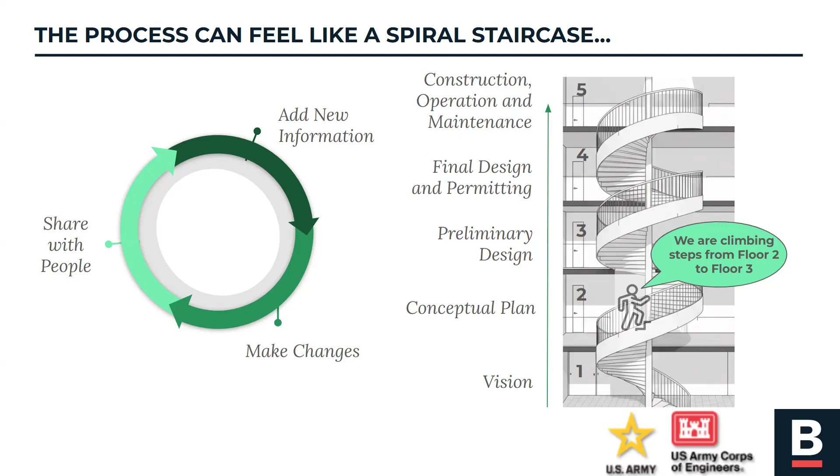Before we dive into tonight's Army Corps 101 and process overview, I want to center folks in this reality: if it feels like a circle, it a little bit is. The analogy I like to use is that the design process can feel like we're continually going in circles at times. But if we step back and look at it from a staircase perspective, I promise you we are going up in our circles. So if the design circle process is to add new information, make those changes, and then share it with people, our goal in this process is to move to the next phase of our work. So where our Climate Ready Boston plans were conceptual plans, we're moving towards a preliminary design goal with our Army Corps partners.

We know that coastal flooding is real, it is evidence-based, it is science-based. That is telling us we are seeing the effects of sea level rise and increased precipitation and storms.

So when we look at turning our Climate Ready Boston plans into action, we're looking at three concurrent strategies. These are all happening at the same time.

Today's storms: we're looking at our near-term response actions, working with our Office of Emergency Management and other partners to work on our response to events and how we can mobilize during storm events.

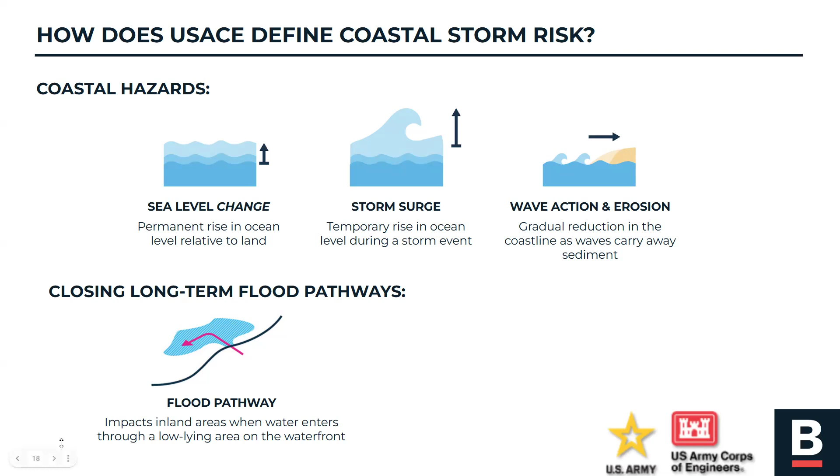So if we're talking about coastal storm risk, we have to understand, well, what does that risk look like visually, so that we can understand it's not just hyperbole and we're not just talking intangibles here. There is science and engineering that supports this.

And so what you'll see here on the screen is you'll see, if you're familiar with the Woods Hole Group Consulting, they have done the Boston Harbor flood risk model, and then they did the MCFRM, Massachusetts Coastal Flood Risk Model. Kate, we're seeing this. There we go. Thanks. The Corps of Engineers,

we have to use our own models because our models are life cycle models. What does that mean? It means we don't just look at one particular event over one frequency over one time period. We have to look cyclically because over time, there's an assumption that the economic damages are going to change, escalate or de-escalate. That structures are going to be damaged and removed from the floodplain, or structures are going to have infill development into the floodplain. And so we need to calculate all that.

In order to do that, we have to use our own model. But what we wanted to make sure is that the City of Boston, the state of Massachusetts, and the New England region, while they continue to use MCFRM, and then we use our coastal hazard system model, they use the same foundational AdCirc model, but the floodplains look very similar. So we know with a great level of confidence that whatever plans we recommend will be able to tie in with the City of Boston's plans.

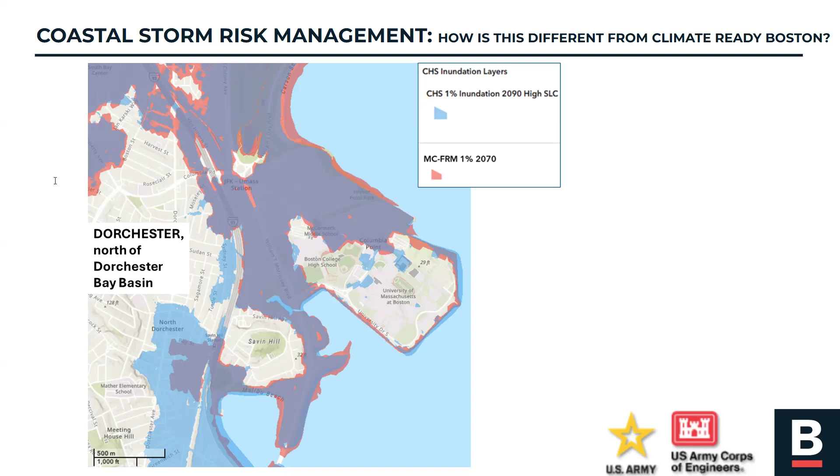Because what we don't want, and if we can go to the next slide to see the southern part in the Neponset. What we don't want is we don't want the City of Boston, the state of Massachusetts, and private stakeholders to invest in resilience projects for us to have to come in five years and tear them out and build something different because it's not part of our program. It doesn't help anybody, and it's not a great use of assets.

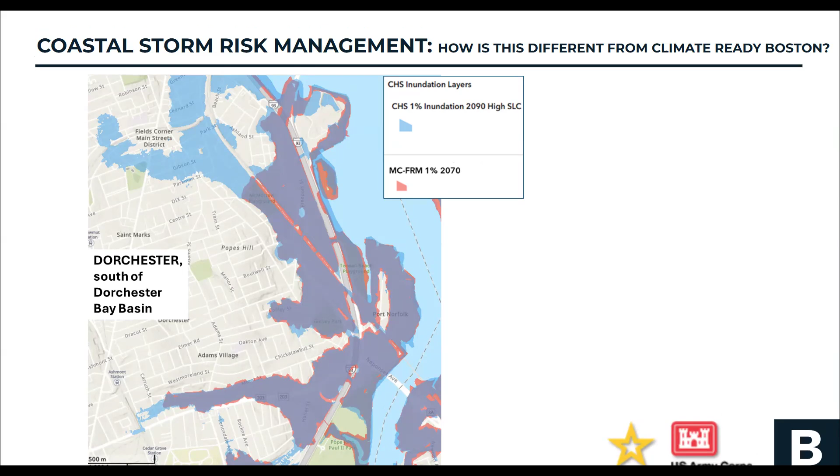So what we've done is we've incorporated the same level of mesh and detail, and we've evaluated the two models to ensure that whatever the City of Boston and stakeholders using the MCFRM implement will be able to tie into our projects. Because the idea isn't that the city does short term, we do long term, so we're going to come in and build on top of or tear up the city's projects. No, we're going to integrate them into a comprehensive system. The intent here is a watershed level system that manages flood risk.

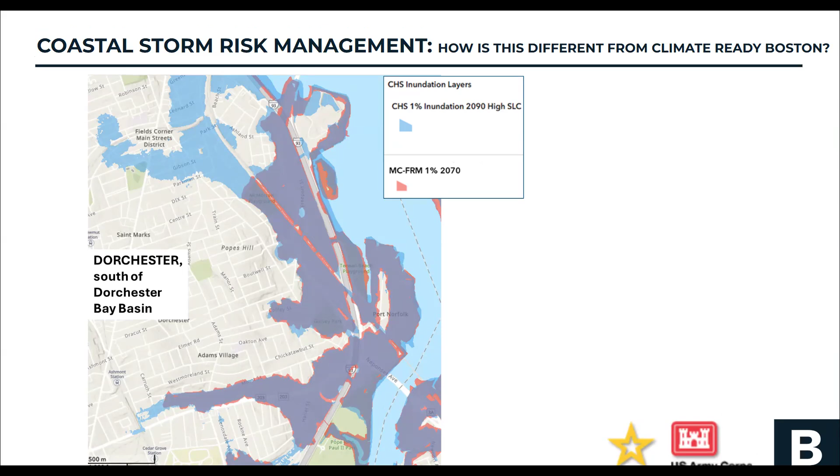I keep talking about managing flood risk. Let's go to the next slide. What do I mean when I talk about managing flood risk?

I mean that we have to manage those risks in order to protect evacuation corridors, public transportation. There's lots of areas throughout Boston where over 50% of the census tracts depend on public transportation. We have to protect those critical infrastructures, homes, schools, government offices, emergency management services. We have to protect housing and homes. We have to protect clearly the critical transportation, but we also have to, it's our duty and obligation to protect natural resources.

I'm a big fan of Aldo Leopold, if anyone's familiar with his work in the 1940s, 1950s. And what he came to realize is if you don't consider natural resources in your planning, then what you end up doing is you create habitat for invasive species, introduced species that create then adverse impacts on your built and your human population. And so if we factor in natural resources into our planning process, we can create comprehensive biophysical and developed community solutions to coastal storm risk.

And so that's definitely still part of our charge. Next slide.

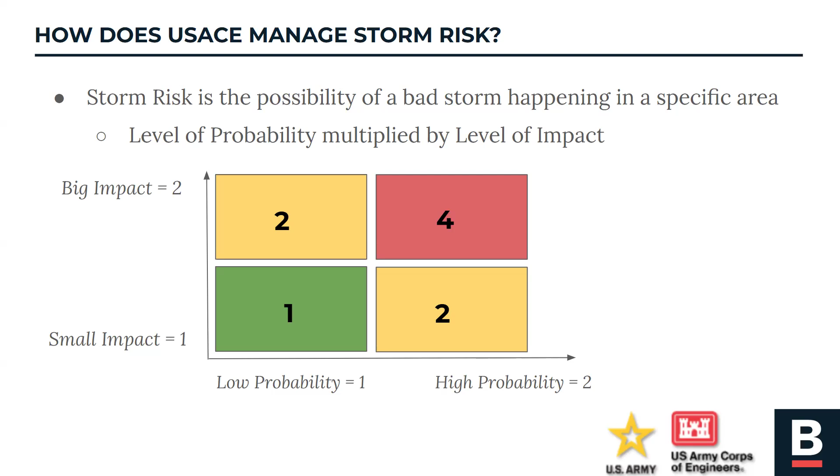The flood came, we realized it's probably not a good place to build, let's move to someplace else. That was a form of adaptation and accommodation. Today, in a built environment, we're not going to pick up the city of Boston. We're not going to pick up downtown in the financial district and move it.

However, there are ways for us to reduce the consequence of the water from coming in. We may not be able to stop the water from coming in effectively, but if we can reduce the consequence, then we are still reducing the risk. And so that's where we come up with those types of non-structural solutions.

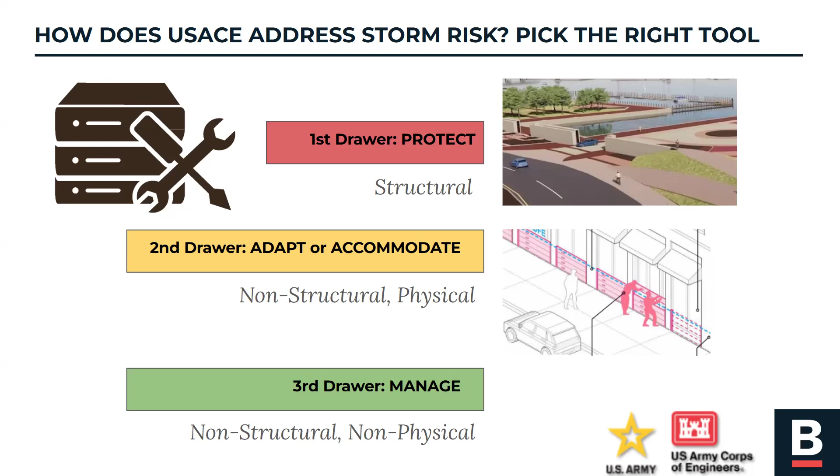And if you're going to understand the tools - next slide, please - you have to understand what the hazard is that's impacting your community. So in Dorchester, you are built in many areas right up to the harbors, or to the developed edge, so you move straight from developed community into the water. In other areas, you have slivers of beach.

Tenean Park or Tenean Beach is an example where you have just a little bit of beach. And then you have other areas where you have a riverine condition, right there in Dorchester along the Neponset, where there may be opportunities to take softer, adaptable approaches.

So it's understanding what is the hazard facing. Is it wave attack and erosion? Not really. The biggest threat and hazard facing Dorchester is the wall of water that comes in, that storm surge, tied to an 11 to 12 foot, 10 to 12 foot tide range, from low tide to high tide.

That makes you different than Stratford. That makes you different than New York. That makes you different than Honolulu, Hawaii, these other places where they're trying to implement resilience projects. When you have such a significant tide range, you have to consider that in developing what your solutions would be.

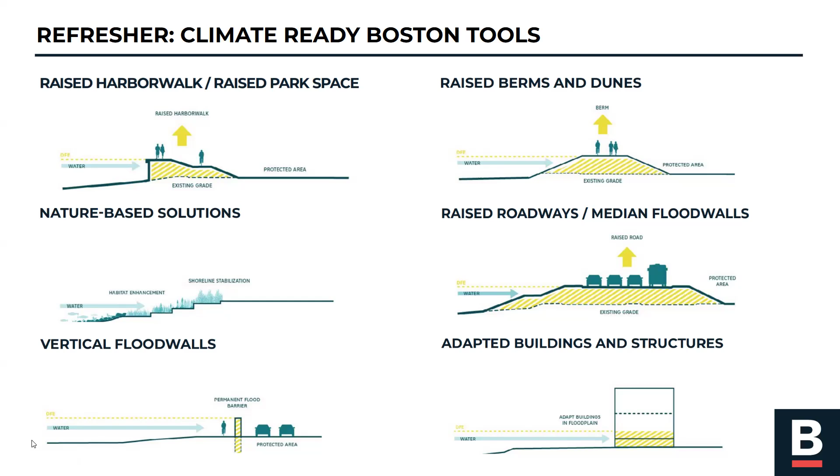So we talked a little bit about this. Here's some examples. Now, what I will tell you is these examples are not your examples. Some of these examples are for tropical events. Some of these examples are for undeveloped and previously undeveloped coastlines.

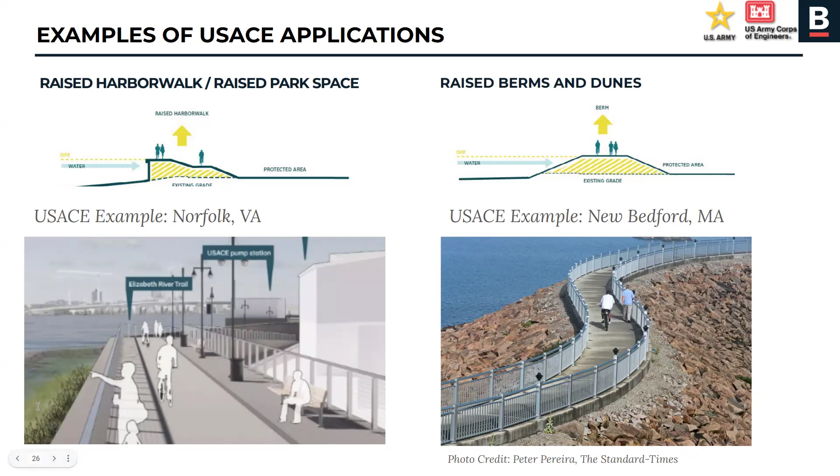So if we're going to build something along the coastal edge, we have to understand and work with Boston Water Sewer Commission. How is it going to impact the interior drainage? How is it going to impact stormwater management? There may be some instances where we need pump stations in order to help evacuate the water so that we're not inducing risk from our projects.

New Bedford - if you've been to Fox Point, New Bedford - there's other examples where we have built very robust storm surge barriers, raised berms, and they perform very well. But am I telling you that the community of Dorchester is going to get a 15-foot solid rock berm that goes along there and you have to get used to it? No, I'm just sharing it as a tool in the toolkit.

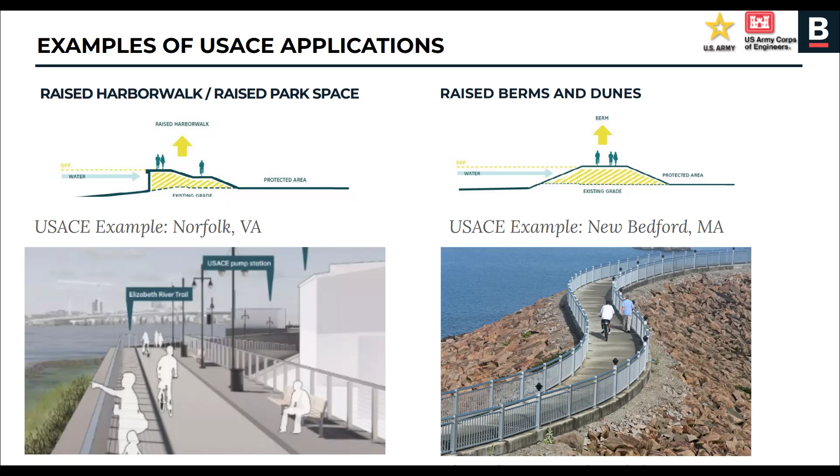Next slide. Flood walls. Dorchester is not New Orleans. Dorchester is not the Missouri River. It's not the Mississippi River. You're not going to have 15-foot flood walls.

But I will tell you, and many of you already know this, that if you walk along the coastal edge, there's significant changes in elevation - not necessarily visual to the naked eye, but in some areas you go from 8 feet NAVD 88 to 13, 14, 15 feet NAVD 88. So if we're talking about having flood walls or barriers of any sort in some areas, we don't just base it off of stick-up height above ground elevation, we have to base it off of water surface elevations, which are based off of the NAVD 88 scale.

So there's going to be some areas where it appears to have a 5-foot stick-up height above ground level, and other areas where you can barely tell - maybe it's 1 foot, 2 foot, maybe 3 foot - and it appears as though it's a new handrail for ADA compliance, when in fact it's actually a flood control feature. So when you see these barriers here in this Norfolk example, I don't want you to think that that's the wall we're considering putting up in Dorchester.

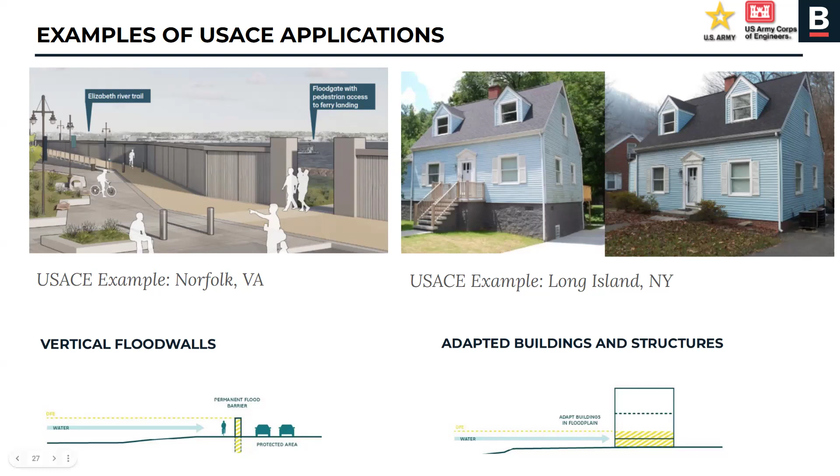So the question is, how can you help today? The same way you've already been participating: ask questions, share your concerns, help us understand what our flood picture looks like, what Climate Ready Boston put forward, what your issues with the Climate Ready Boston alternatives were, and what we're missing in our alignments.

We're getting ready to go into this next phase of discussion tonight, where we'll show you what alignments we're looking at in different areas, and what proposed tools we're looking at in those areas. You'll see a couple areas with nothing on the map, because we're still trying to work through a lot of complexities in some of these areas.

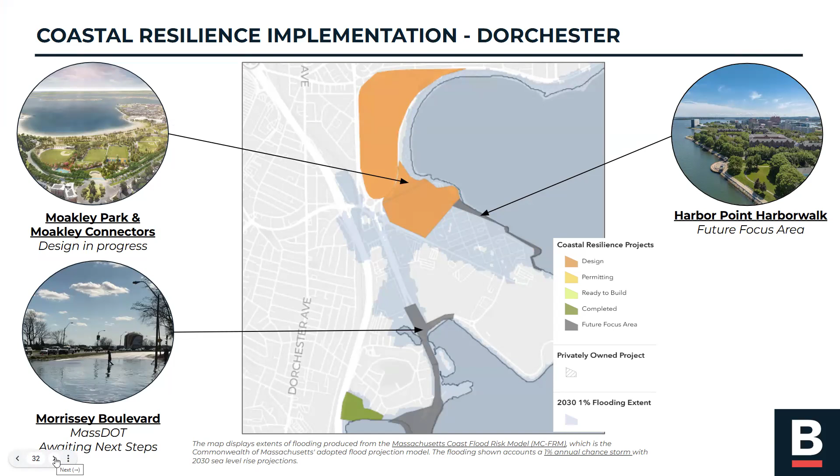So as we travel from north to south here, there's some areas where it's going to feel like I'm going a little bit faster, and some areas it's because we don't know what we don't know, and a lot of it's tied to what other folks are working on in other state or city agencies. In other areas we're going to spend a lot of time because I want to plant some seeds and start some conversations that need to happen over the next couple of months.

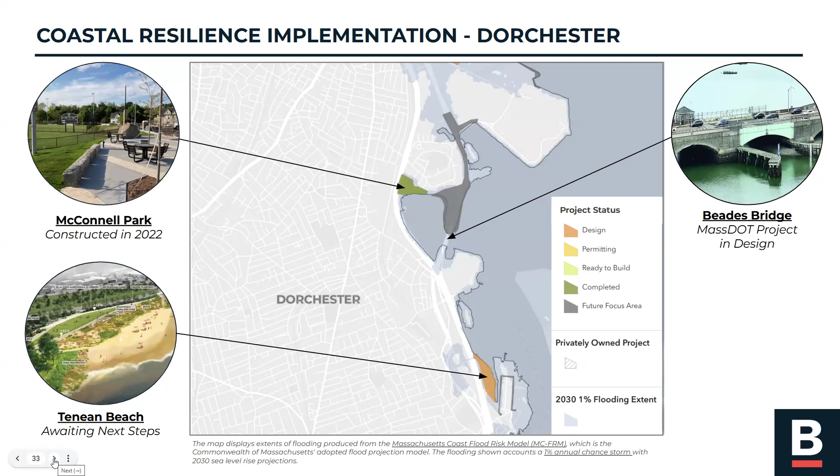So what you're seeing here, the first two slides, is just a repeat of the fact that the Corps of Engineers is one piece of the resilience puzzle, but credit to the state of Massachusetts, DCR, Massport, MBTA, and the city of Boston. They're not resting on their laurels waiting for the Corps of Engineers to implement a project in 2040 that can't address a flood risk that's going to happen in 2030.

So McConnell Park, Tenean Beach. As you look, there's 7 areas highlighted in circles. These are the flood pathways, and those critical areas where we've identified we got to do something. And if we don't do something, we're not going to be able to create, construct, and implement a comprehensive system of features. We'll be putting band-aids and creating weak points along the coastline.

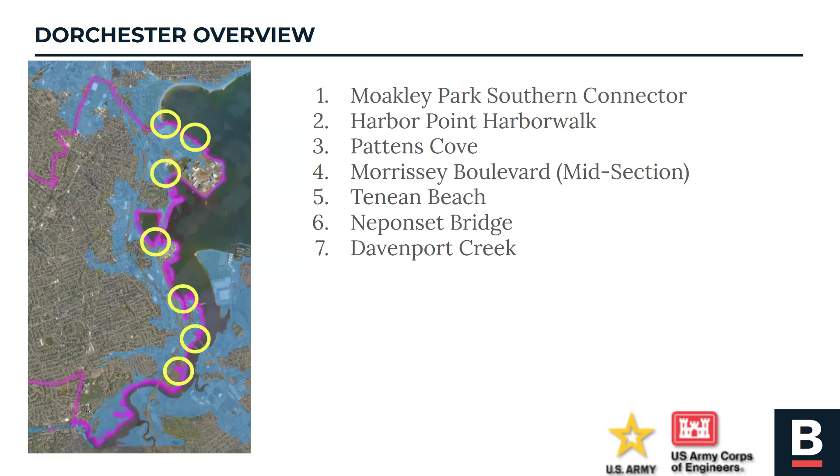Now, what does that look like from reducing probability versus reducing risk consequence in order to manage the risk? It's a little bit different across the neighborhood. So let's take a look, starting with Moakley Park.

At the tail, the southern portion of Moakley Park, we know that the city and Boston Planning are working on Moakley Park, and we realize that there's FEMA BRIC grants in play. If you look at this alignment it should line up pretty closely with the city's vision. And it lines up with that, not just because it's the city's vision, but because it's the vision that makes sense. It's the vision that allows for the necessary elevation in the barrier, but it allows for enough space from what limited beach you have to try and allow for some natural processes in order to allow for reduced risk of exacerbating the erosion risk along that area.

And so then we move down along this area, and then there's the Harbor Point community. I believe we have some folks from the Harbor Point community online tonight. And then it ties in up here at the JFK Library, which quickly grows or increases in elevation. So that's kind of the tie-in point.

Now, what does this look like? It could look like many different things. It could look like a flood wall on the land side, not the water side. It could look like a flood wall on the water side, not the land side. There's an existing harbor walk there in case someone's not familiar with it. But if you do a landside flood wall, then you have to have openings along that flood wall to allow people access to the harbor walk, or you have to relocate the harbor walk. But at what cost are you going to do that?

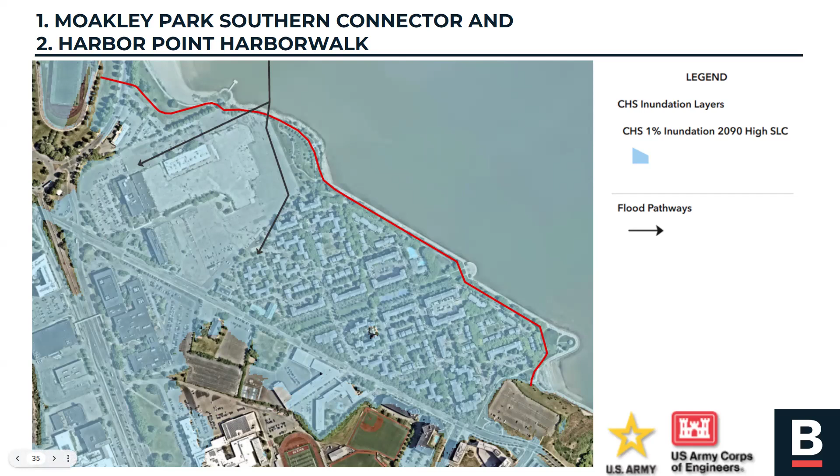We're just going to let the private properties fend for themselves. That's not how risk management works. It has to be a comprehensive and complete solution. Next slide.

All right, so now as we look at Pattens Cove, Savin Hill, and Morrissey Boulevard, we recognize that DCR, the city of Boston, there's a lot of people who have a vision for what Morrissey Boulevard looks like. We are open to all of those discussions and we are part of all those discussions, and we appreciate being part of them.

However, right now, in the limited authority we have and what our charge from Congress is on this study, we are looking at some sort of barrier along the back of Pattens Cove. We recognize that it would have to come up and somehow cross Morrissey Boulevard. Does that mean elevating Morrissey Boulevard, or does that mean a closure structure going across? We don't know, but we recognize that in order to have a complete solution, we're going to have to incorporate something through this Morrissey Boulevard area.

And then on the other side, we recognize that we have to cut off that flood pathway. Now, what you don't see here is at the bottom of this screen, if you zoom in, you'll see there's a lot of blue on some houses. So this is one of those areas where it might make sense, rather than trying to take people's property and construct a flood wall or barrier, to just non-structurally adapt these homes in the near term and long term. That might be through elevation or other ways. We're not saying we're buying out these homes and telling them to go find someplace else to live.

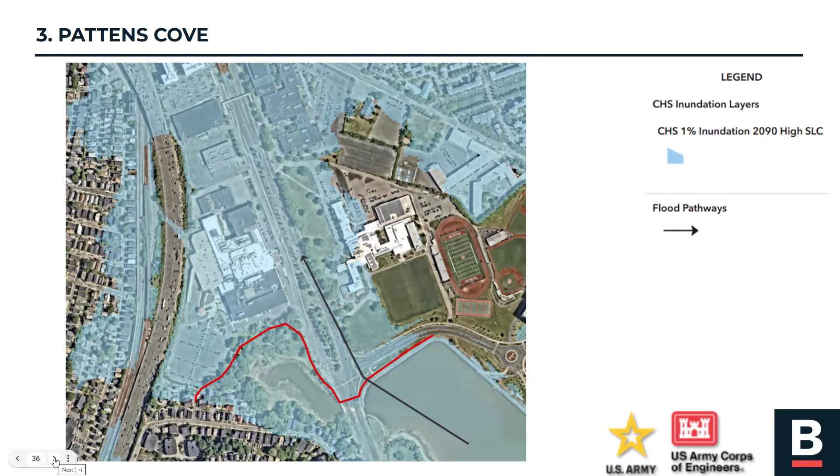All right, Morrissey Boulevard, the Castle Island bridge through here. I think everybody familiar with the area recognizes that in a lot of storms today, this becomes impassable already. There's a lot of discussion as to what the right future vision is for this, and so we are open to all of those discussions. We're a part of all those discussions. However, right now, when we look at it strictly from a coastal storm risk perspective...

We look at the fact that in a future without-project condition, water comes through this Morrissey Boulevard area under 93 here. So we could address that through a closure structure at the end that closes this off, or we could address it through a flood wall through this little peninsula. So which one are we going with? We're not saying, but we do want to understand what are some of those environmental impacts, what are some of those transportation impacts, what is life like today when this road is impassable because of a storm, and so everybody has to take alternate means to get around this Malibu Beach, Dorchester area.

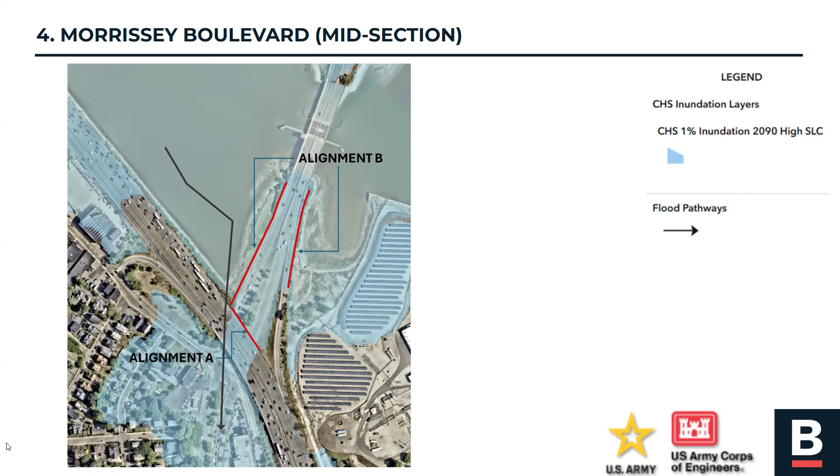Tenean Beach. So with Tenean Beach, if we look strictly at today's alignment of the playground here, you have an existing harbor walk. Similar to discussions I've had along Harbor Point, along Charlestown, and even in downtown—if you have an existing harbor walk, that means you already have some rights of way and some public lands. So wouldn't it make sense to just elevate that harbor walk to create a barrier to keep the water from coming in?

Well, if there's a change—and there are some visions and plans out there to change the alignment of the harbor walk, to set it further back and revision what this playground looks like—we are more than happy to have those discussions and look at moving that alignment from the coastal edge further back, closer to Conley Street. Why would we be in favor of that? Because that creates more green space and a more natural process for water to do what water wants to do in front of it.

And so we're more than happy to have those conversations and look at those alignments of taking this red line and bumping it back here closer to Conley Street, and just kind of reimagining what that Tenean playground and that Tenean beach could look like.

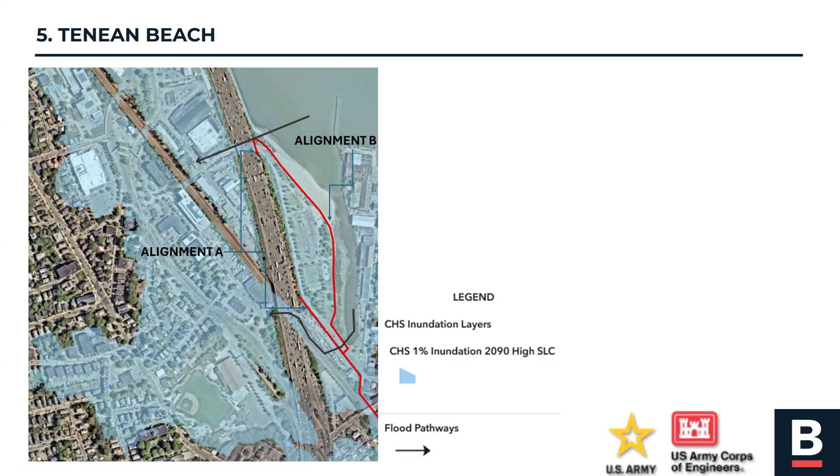We recognize that with our Tenean Beach alignment, we come up and tie in to Franklin Street over here, on the other side of the Neponset Creek at the head. We recognize that there's stormwater outfalls there with Boston Water Sewer Commission. We recognize that there are roads that go down and around the community.

And so logic might tell you, well, let's just elevate the road. You could elevate the road, but if you're going to elevate a road that has traffic on it, depending on how many lanes, you need a certain crest elevation, that top elevation. And you need it to be so structurally designed that not only can it stop the water, but it can absorb all the traffic on top of it, whether significant levels of traffic or light traffic. And in order to do that, you also have to have a slope coming down off of it.

So if you elevate those roads, what does it do for those homes right there along the road's edge? How much of their property are you going to have to infringe upon? Will it be a full parcel taking because now you've got such a slope that they can't even get in and out of their driveways?

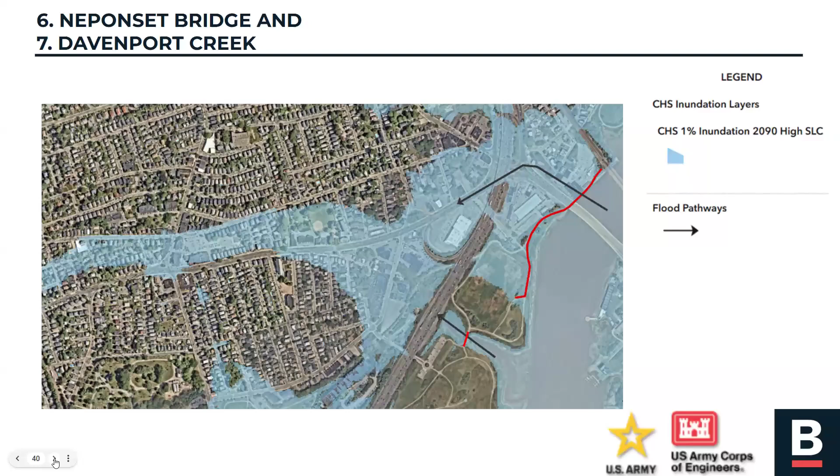Long-term projects to address long-term risk. We're looking at 50 to 100 years. We're asking you to consider beyond 100 years. But the city of Boston is already working on those near-term flood pathways. Those will be integrated into our project, not torn up and thrown out the window and redone when our project is ready to be constructed.

We're asking you to help us understand, from a community perspective, when this system is not active and doing what it's supposed to be doing to protect the community, it needs to become part of that community's identity and characteristics into perpetuity. So how can we get your feedback to make you a part of that process, understanding that we're not going to make everybody happy? If we can all agree on what the risk and the hazard is, we can agree on the approaches, and then at least accept the difference of opinions, but accept a plan that is constructible, implementable, and affordable for people to maintain.

All right, I went over, but I think we still have some time for either feedback in this venue or feedback online. We absolutely do have time.

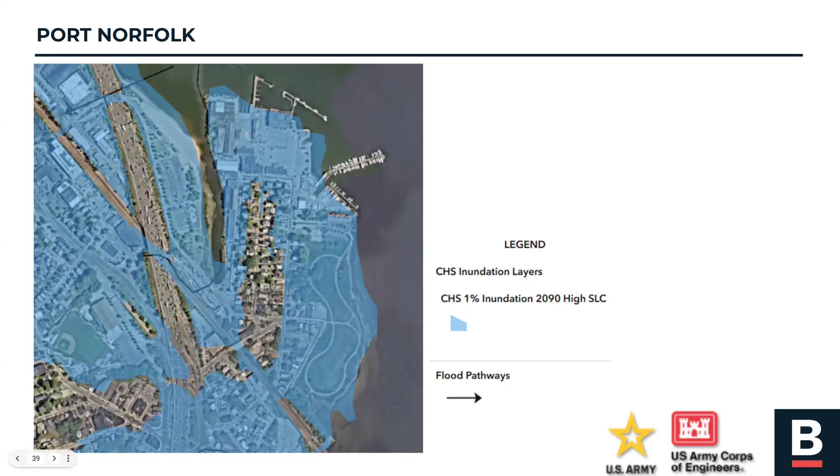Okay, thank you. One more thing I wanted to ask—are you working on the Quincy side of the river as well as the Boston side? So I am quasi working on the Quincy side. What I mean is my partner, Barbara Blumeris, a colleague of mine with the New England District, is working with the state of Massachusetts EEA on a metropolitan watershed study, a much larger study that includes Boston plus all 18 coastal communities. So from that perspective, we are looking at the Quincy side, and we have to consider how our plan on the Neponset impacts the Quincy side. So yes, we're considering it, but we're not looking at how to manage the risk specifically on the Quincy side.

Okay, thank you. There might be someone else in this group who wants to ask a question. So if I raise my hand again, it's not me, it's somebody else. Okay, thank you. Maria, do you have a question, Ed? I do—oh, Ed Rocher.

I'm a 52-year resident—well, not 52, but I've been here for over 50 years. I'm an architect, and I've been working on Luther Briggs's, one of his masterpieces from about 1820 on Walnut Street. I've been reviewing one of our current development projects that's on the table right now, and I was struggling with this for about 2, 3 days, and then finally I said, well, wait a minute.

This person, their architect, for the developer, had some good ideas, but they seem to be towing the line on a lot of different items. And I said that it was just so frustrating to try to understand where they were going with the design plan and how it would affect the quality of life in terms of the milieu of the port.